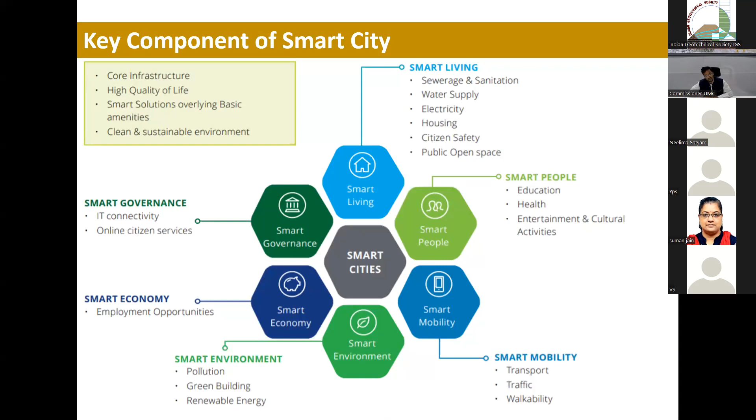Next, please. So as I mentioned earlier, the main focus is on how to gel all these things together, how to improve the mobility, how to improve the environment, how to do smart governance, smart living, which will involve your sewerage, water supply, electricity, housing, citizen safety, and quality of life. And there is an effort to converge different government schemes, like Pradhan Mantri Awas, and replacing old electrical infrastructure with new LED lights, new roads, and new sewage infrastructure. So there are many things which maybe smart city is not driving, but it is acting as a converging authority. Next, please.

Yeah, so basically the first part is institutional infrastructure to drive down the activities. The second part is physical infrastructure, which we all can see, roads, sanitation, and supply. And the third part is very important because without this third part, the second part is meaningless. So it's about how to improve the soft aspects, or the capacity of the populace of a city. Next.

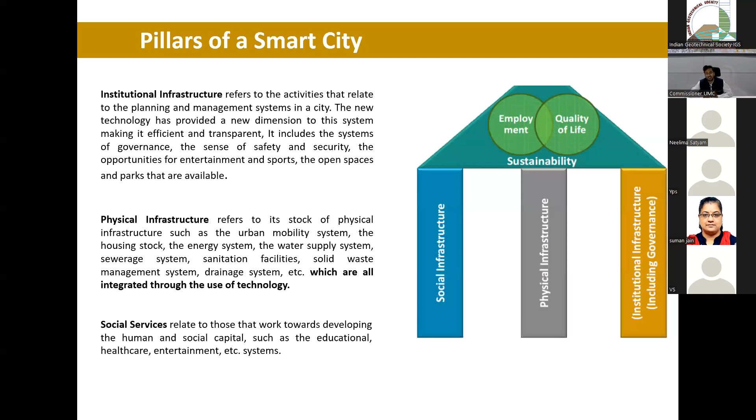So one very important thing which was introduced in Smart City Mission was area-based development. So in every city, typically the old city part was chosen for redensification or redevelopment, and retrofitting of the infrastructure was planned, because in many cities the infrastructure we have right now was planned or executed pre-independence or in early years of independence, either by the Britishers or by the princely states. So that infrastructure, especially the sewage and road network, is insufficient to meet the needs of the current population level. And then there is something called pan city initiatives.

So mostly what we call smart governance, and how we can harness ICT in governance, be it intelligent traffic management systems, or smart metering in electricity and water consumption, and multimodal transport systems, and a CCTV network in the entire city with crime monitoring via that. So those pan city initiatives heavily rely on technology and try to make service delivery more intelligent, less costly, or more effective.

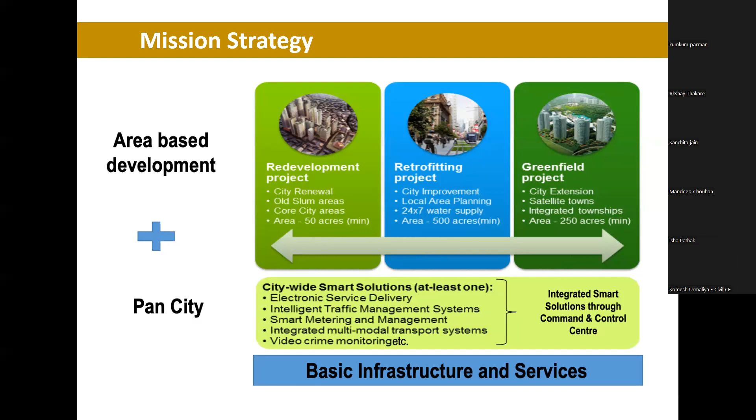Next, please. So city selection was based on the population and how the cities presented themselves.

More or less, many big cities, most of tier 1 and tier 2 cities across India have been selected. In my state, Madhya Pradesh, there are 7 cities - Indore, Bhopal, Gwalior, Jabalpur, Ujjain, Satna, and Sagar - that have been selected for the smart city mission.

The idea is that since this is the right time to develop tier 2 and tier 3 cities, the pressure on the metros and megapolises is reduced. There were different rounds where cities submitted their proposals, and on the basis of this, they were selected.

This SPV, which is a new kind of concept at the city level, is executing it. These SPVs have full-time CEOs and nominees of central, state, and ULB, and it's a very autonomous body which has been given power to plan and execute the projects.

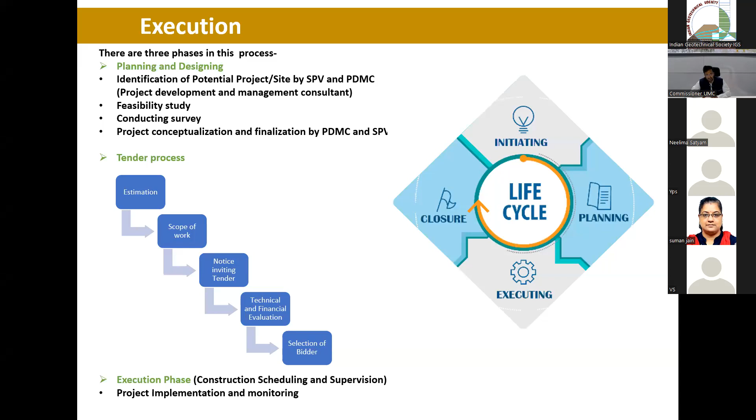A very important part is asset maintenance. While operating the project, asset maintenance is one part which needs attention. For that, most of the projects have been formulated where O&M of 3 to 5 to 10 years, depending on the asset, is built into the program.

There is a huge focus and emphasis on PPP mode, so that the risk capital allocation from the SPV side is reduced, and more projects can be undertaken with less capital.

Ujjain is one of the ancient cities in the world, almost as ancient as Kashi, as we now call Varanasi, and it has many firsts to its credit. Vikram Samvat, the Hindu calendar which we all follow, owes its origin to Ujjain. Ujjain is the city of the famous poet Kalidas, and the Indian meridian line.

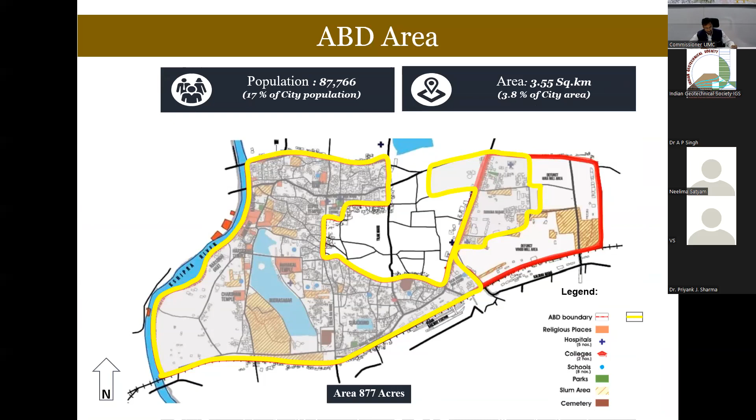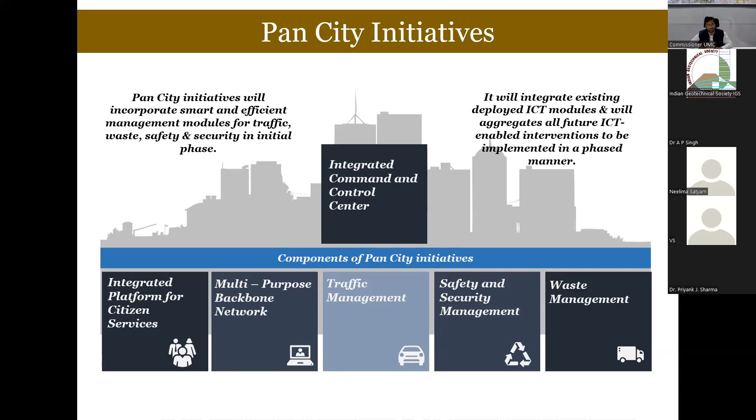The PAN city initiatives we have taken are based on ICT. For citizen services, we have a 311 app where all kinds of citizen services can be accessed and applied for by citizens. We also have an integrated command and control center which hosts all the applications and makes data flow from one application to another. For traffic management, we have put up RLVD cameras at all traffic junctions, controlled from the centralized command and control center. For waste management, we have a door-to-door collection mechanism which we monitor, and we are also processing all our wet and dry waste.

This is our very prestigious showcase project. We are trying to develop the area around the Mahakal temple, just like Kashi, by acquiring land around it. Most temples in ancient Indian towns face the issue of managing devotee load because of bottlenecks in the access and exit areas. We are trying to address those bottlenecks and create a space where the capacity to handle devotees increases manifold. In addition, we are creating facilities for devotees such as resting places, kiosks, visitor facility centers, better roads, evacuation by e-carts, and various bridges and roads.

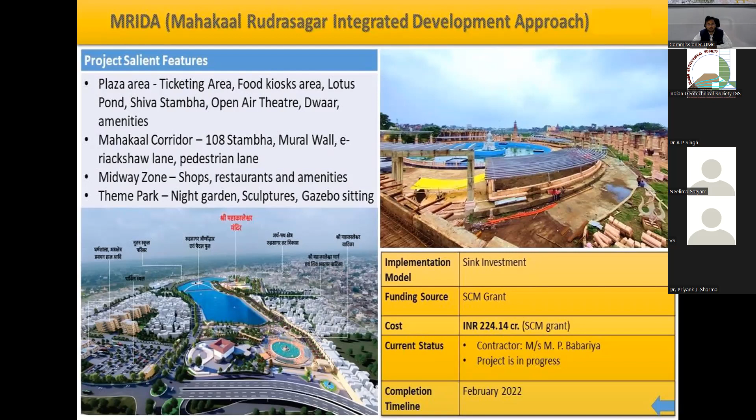This gives a bird's eye view of the whole project. I would like to invite all of you to visit Ujjain. This is under execution and we hope to finish it by February '22. After that, I think this would be the best, or one of the best, religious pilgrimage sites in India in terms of infrastructure available.

We already have a museum, the Triveni Museum, and we are creating open air theaters. We will have a zone where devotees can come and, like what we have in the West, experience the place. So apart from doing darshan and rituals in the temple, they can also get exposure to the rich heritage and culture of the city of Ujjain and the associated concepts of Indian religion and mythology.

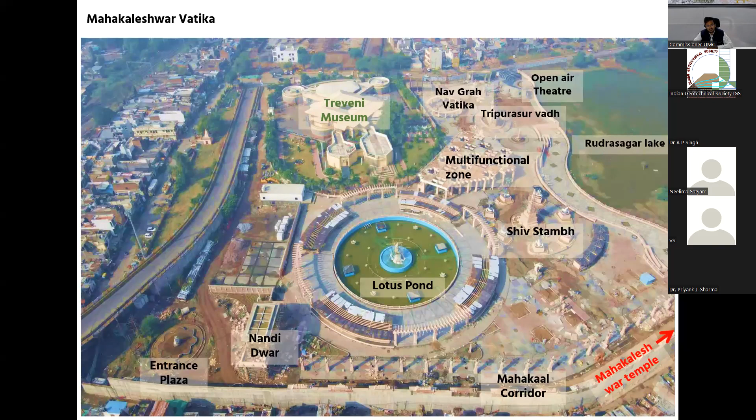This is one of the projects we are doing. Now coming to the technical part, since I'm not a civil engineer, I may be lost trying to explain it in the exact form you desire. But as I mentioned earlier, there's a huge part of civil engineering involved in day-to-day administration.

For example, this pond which we are making: there used to be an ancient water body here, mentioned in scriptures also. With time, the land was encroached and that ancient water body disappeared. So it was planned that we would try to revive it. When we tried to dig, we actually found that there is a water source, so there is a task to locate from where the water is coming.

I think here geotechnology plays a very important role, and we have to determine how to regulate its function. During rainy season, when the arrival of water might be more, we also have to ensure that the existing drainage network and this natural water source should not intermingle with each other. And how do we recycle this water continuously so it remains fresh with no bad odor. The construction around it should not hamper the water movement or the natural beauty in any way. These are the broad parameters around which our architects, planners, and civil engineers have to work.

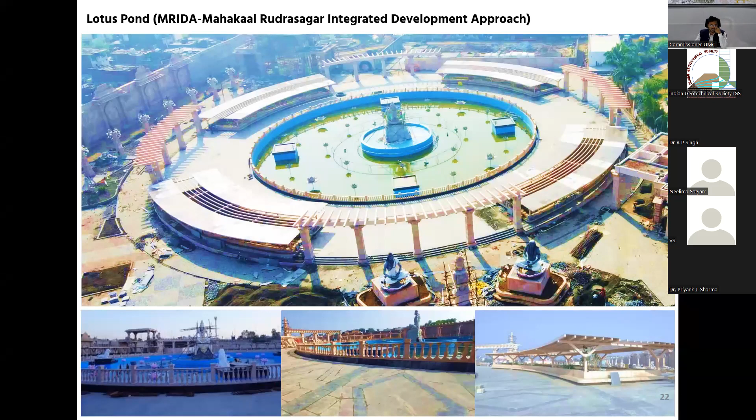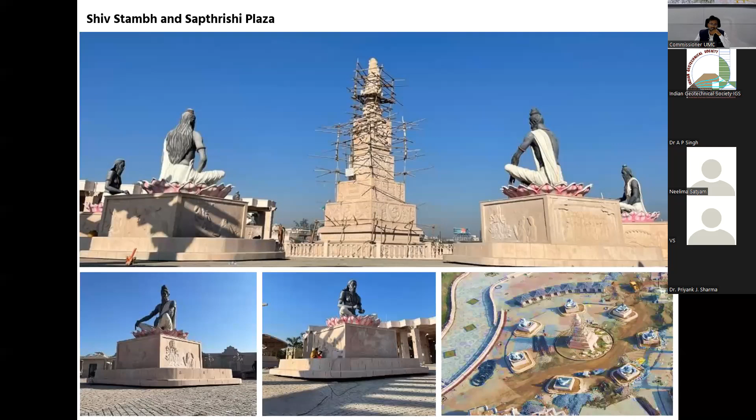This is once again new technology. We are using FRP, fiber reinforced plastic, to make the statues. What we see in this picture are the Saptarishi which we are making. Traditional stone sculpture takes time, and while it's not fragile, it's very susceptible to wear and tear. As a substitute, this new material we are using is a form of value engineering, because it gives the same look and feel as stone sculpture, but at a fraction of the cost and faster to make as well.

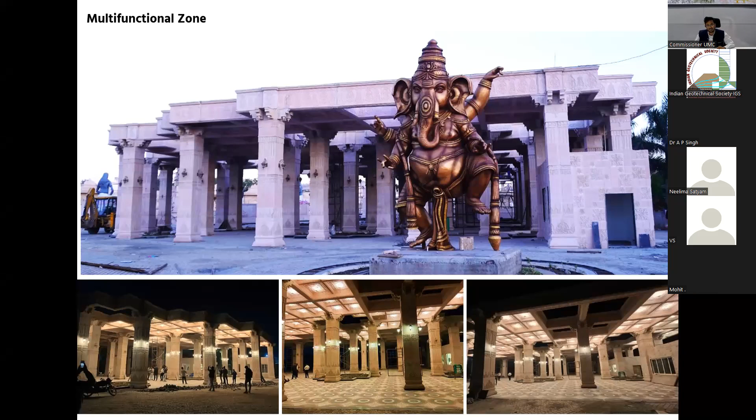These are some pictures of the plaza and the Lord Ganesha statue at the entrance. And these are the under-construction phases, just to give you an idea of the scale and expanse of the whole project.

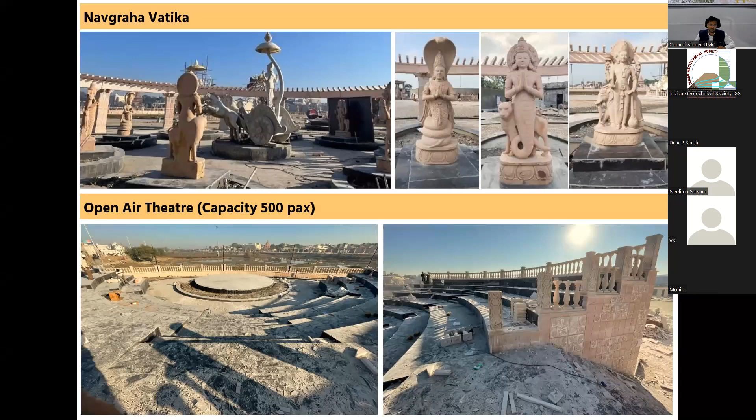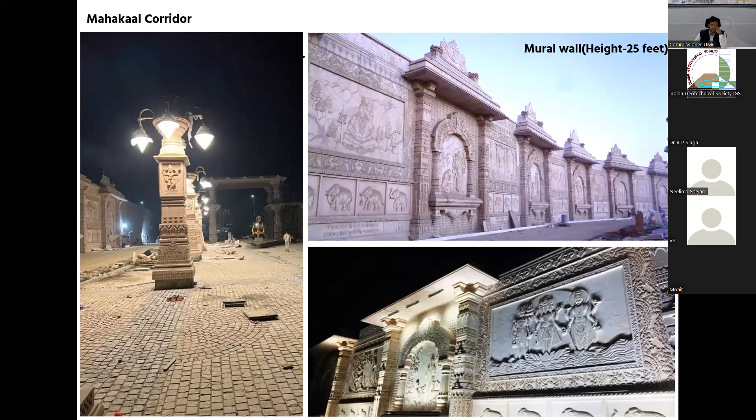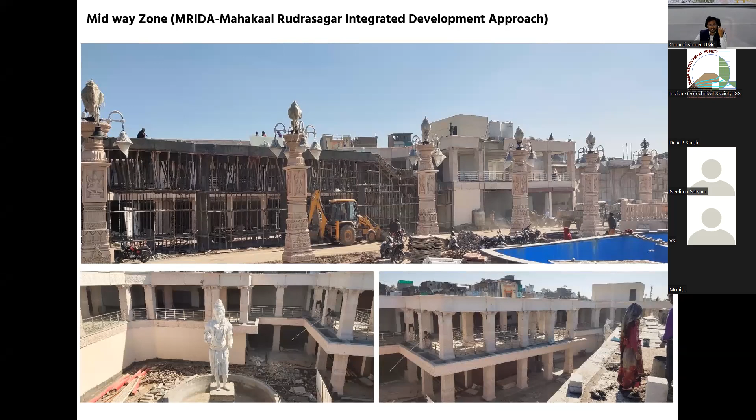This is one of the pictures of our visitor facility center, where we'll be creating a facility for devotees when they arrive at the temple complex. Here they can put their shoes and belongings and get registered, since there is a security aspect as well, and they can rest, with drinking water, toilets, and other facilities.

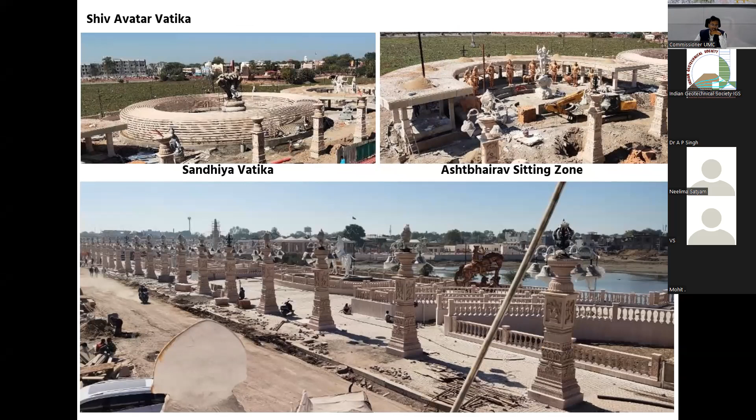This one is NeelKanth Van, one of the land parcels on one of the main roads which we had acquired. It's near the riverbed, so this is also one of the aspects which will interest civil engineering.

This is not the Mannat Garden area, no? The Mannat Garden one, no. No, this is the other one.

Here basically what we have tried to do is integrate a parking space, a resting space, plus landscaping in a single thing. This is something interesting from the civil engineering and architecture point of view, because these are the needs in such public infrastructure -- you just can't create a bare parking space, because it is aesthetically ugly and it doesn't address the requirements of visiting people. So here we have parking as well as sitting space plus a garden area, because all construction and development should have, as per norms, 30% or 40% green space. We have tried to follow that instead of making concrete jungles.

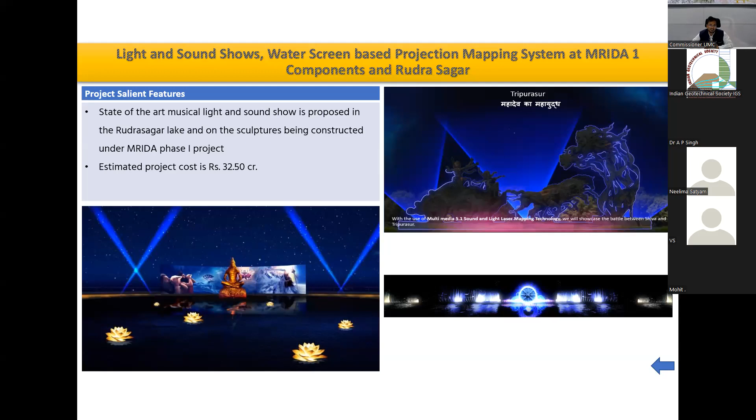This is one of the very interesting projects. We have a very old, around 200-year-old Maratha style architecture, what we call a Dharamshala. Because this was Maratha territory, and now that building has been converted into a school.

So now we have shifted school, and this old building we are trying to preserve, but functionally make better use of it. So we are now trying to make it a heritage Dharamshala, or we can call it a hotel cum museum. IIT Indore is associated with it because we took help of experts from IIT Indore for the structural audit of the building.

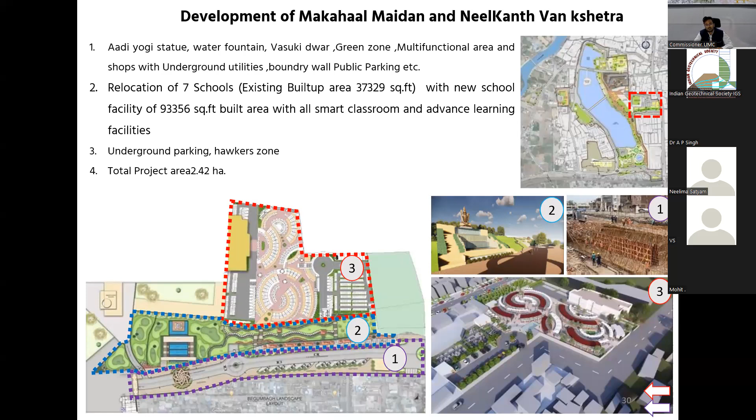This is also one of the interesting projects. There used to be this old pathway from the river ghat in Kshipra leading to Mahakal. I don't have an old picture, but this was covered in bushes, soil and mud. During digging, we discovered it, and then we tried to revive it. We plan and hope to finish this very soon, and this picture shows how the work is going on.

Once again, we are trying to use the old material with which it was made. We are not doing any cement or concreting kind of thing, and using the old filling material of lime and mortar.

I think this is a very interesting thing which technical experts working in this field should think about, that these kinds of buildings are strewn all over India. As we progress and become more aware about our ancient culture, we try to revive this infrastructure with more environment-friendly materials, actually with the materials which were used in olden times, to maintain their glory or past form, so that the current generation can connect with them.

This is very important from an engineering point of view, I think. Whether you call it civil engineering or geotechnology, the kind of structures which were made in ancient times, without the help of heavy cranes or heavy machinery, are buildings which survived for so many hundreds of years.

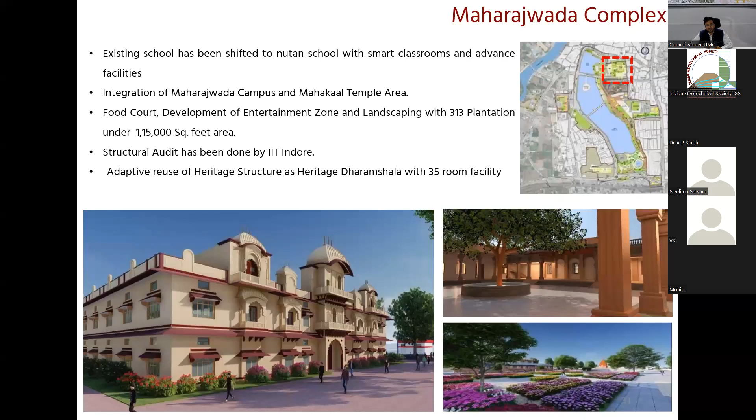So this is like one of the water bodies, Rudrasagar. All the pilgrimage sites and old temples used to have, and were bound to have, a huge water body near them, which had multiple functions: used for drinking water, to get water for the deity, and for bathing by the devotees. After we started having municipal water supplies after the 1950s or 60s, gradually all these water bodies lost their importance in the mind of the public.

Citizens started using them as dumping grounds or encroaching upon them. Now with the concerns about climate change and sustainable development, once again city planners are focusing on these kinds of water bodies. I think this is also one of the areas where technical experts, this society and other societies, should focus on - how do we revive these old water bodies.

All these water bodies across the cities and towns in India are facing 2-3 issues. One issue is huge population pressure - we have quadrupled our population in the last 75 years, so there are quite a good number of people living on the same land. Because the population has quadrupled, there is a requirement of drinking water, and generation of sewage, which should not go directly or untreated into these kinds of water bodies.

It's a very sad situation that most of these water bodies have very high BOD levels, and even the marine life inside them has dried up. A few water bodies can be undertaken by cities under smart city missions, as you know, because they are marquee projects. But I think it would be very wonderful if various water bodies are revived.

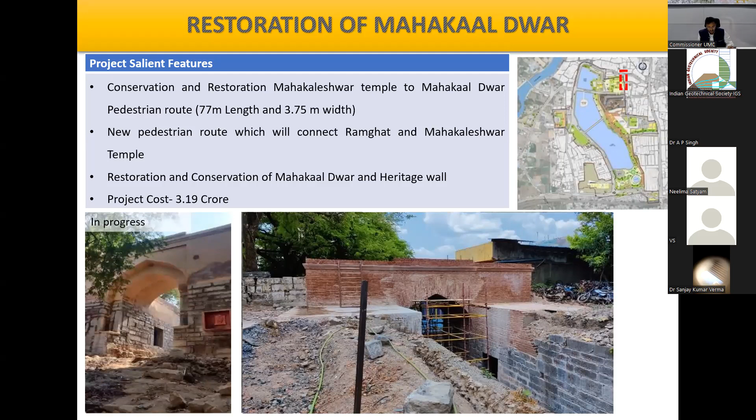This is once again a kind of modern development. Normally what we see in our cities is that the road is made, and after making the road, after 6 months, the water supply department comes and digs the road to lay the water pipeline. Then after another 6 months, the mobile company comes and digs the same road for laying the optical fiber. And if this is not enough, after 6 months, the gas company comes and digs the road for laying the gas pipeline.

To address all those kinds of issues, for the new development, we are trying to create smart roads. We are giving the ducting and leaving space for all kinds of future linear developments, so that the road is not dug again and again. Plus, these roads have ample walking space and cycling space, so that going forward, citizens can move to this environment friendly aspect of transport.

One very important part I would like to point out is that this kind of roads are very costly, and as opposed to national highways where you can have toll and try to recover the cost of the road with time from the users, intra-city tolling is not right now prevalent in India, and it's not right now possible either. So we need to think about modes of development, because simply on government funding, maybe we can't make all the roads in this kind of smart roads with ductings around.

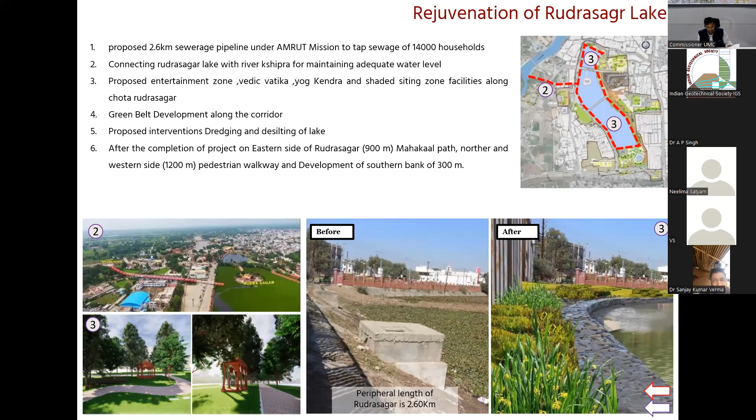Next please. Yeah, so this is our riverine ghat, and one very important thing which I learned or discovered while being involved in these projects is that river ghat is a very unique Indian concept. First of all, rivers are gods, I think, not in many civilizations. Indian civilization is very unique that we worship rivers, and river ghat is a very unique concept.

So you go to China, or you go to Egypt, or you go to Babylon like Iraq, or you go to European nations, rivers do have important places in their civilizations, but none of those countries typically have a concept of river ghat, where steps around the river is such a nice concept that it's a public place. Public can come here and indulge in all kinds of activities, be it religious, be it secular, and in that way it's a very egalitarian concept also. So I think that is the reason that all our cities, especially riverine cities and religious places, have ghats.

So developing these ghats is kind of what you see in European cities as public plazas, or the places where people come and congregate and various kinds of activities happen. I think the river ghats had similar role in our ancient life, and that is what we are trying to derive here also. Plus, there is a very utilitarian angle of enhancing the capacity to handle the number of devotees, or crowd, or people also.

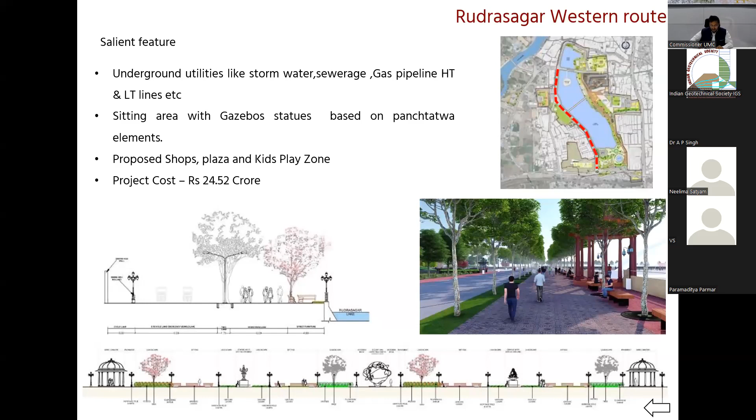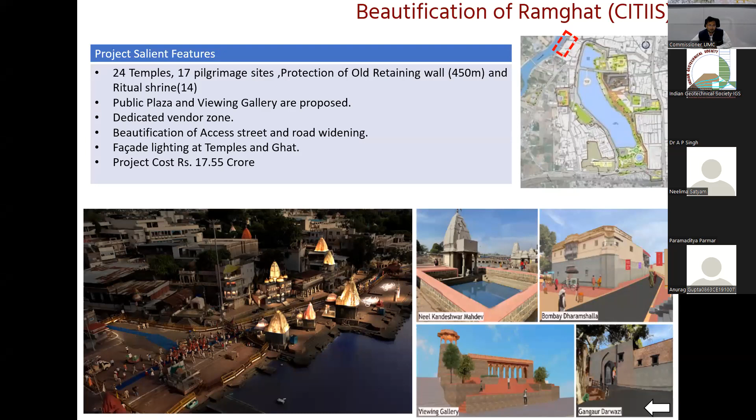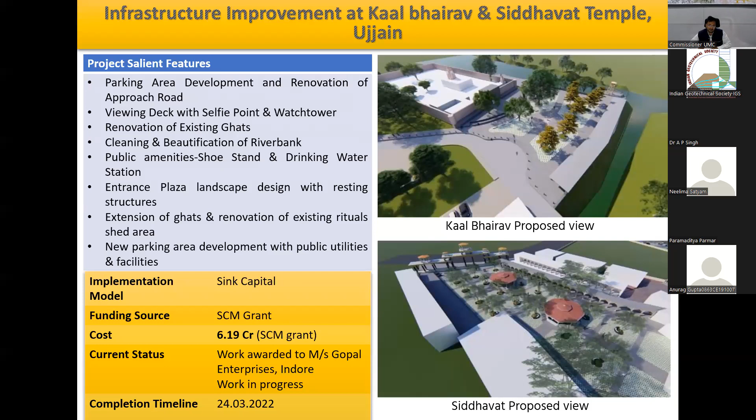Some of you might have heard about it. This is a kind of compulsory part of development nowadays, so we are planning to have a light and sound show here as well, depending on new technologies, be it laser or water screen and all those things.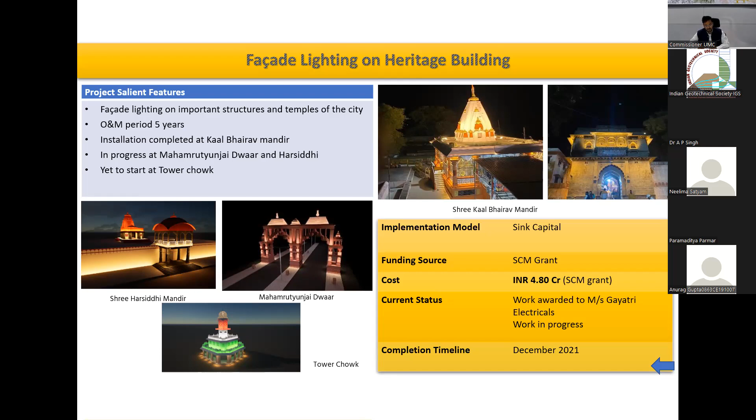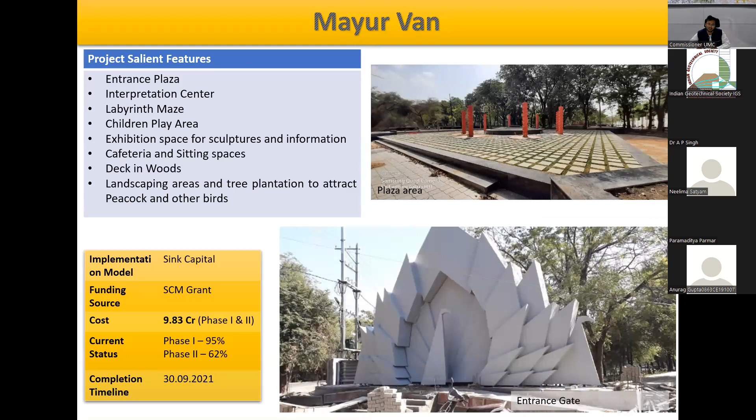This is just a picture of how the temple looks now. Of course, we are using the dynamic effect - we have synced the sound with the light, so when the sound changes, the light also changes colors accordingly.

We are also developing some gardens across the city in the pan-area city development, because having public spaces, secular public spaces where people can go and relax is very important for the mental well-being of the population.

This is one of the projects I was mentioning earlier. This is a very nice Baoli, and all of us have seen photos of Rani Ki Vav in Gujarat or Agrasen Ki Baoli in Delhi. If you see the first one, we call it popularly Modi Ka Chopra, and I think in its scale and expanse it is no less than those two places. Our failure or shortcoming has been that we haven't been able to project it on a national consciousness or promote and advertise it as much as other places have done.

These are a few pictures of different old water structures which had gone into disuse. With the help of remote sensing and geotechnological advancements, it will be very interesting to see how these water networks used to operate, how they are connected, and how they can be revived. Right now we are trying to do desilting and trying to dewater and clean them, but I think more technological interventions can be done which will make this intervention sustainable.

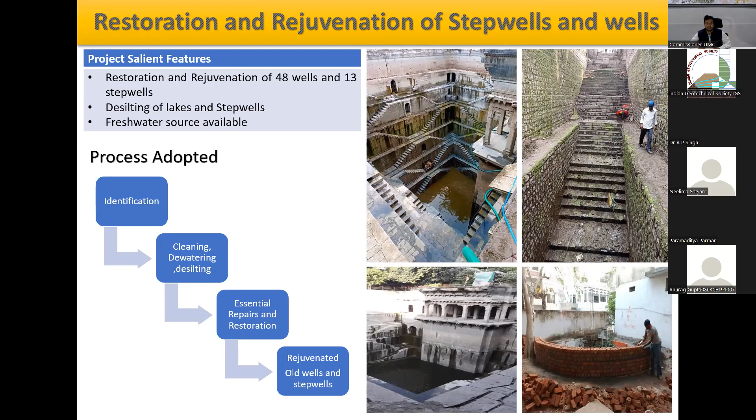One thing we are trying to do is a SCADA system. Traditionally, water supply works by taking water from the river or some source, pumping it to different water tanks inside the city, and then pumping it to households. But monitoring the water supplied, quantity and quality in a smart way is happening in metro cities, but not in many others. It's very important to know how much water you are pumping in the city - this will help reduce non-revenue water and also help us move toward metering, because right now it's flat metering in most cities. Once water is metered, measured, monitored, and charged for, citizens are encouraged to use it judiciously as well.

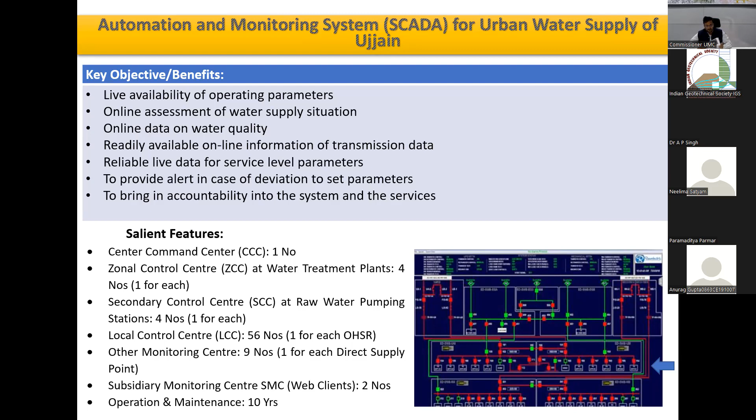These are some of the school complexes we have made - these are government schools, mind you, not private schools. The whole idea is that human development is also important in this. In this lower picture, you can see on the roof of the school we have solar plants - the effort is to make this building a zero discharge building. We have put in vermicompost, wastewater STP, as well as the solar plant, with the idea of making a smart school in the true sense, coupled with smart classes. The last two years of COVID experience, when classes moved to online mode, validated that e-learning would be the way going forward. This kind of facility should not be reserved only for students in the private sector - students in the government sector should also benefit from this new concept. That's the idea behind this project.

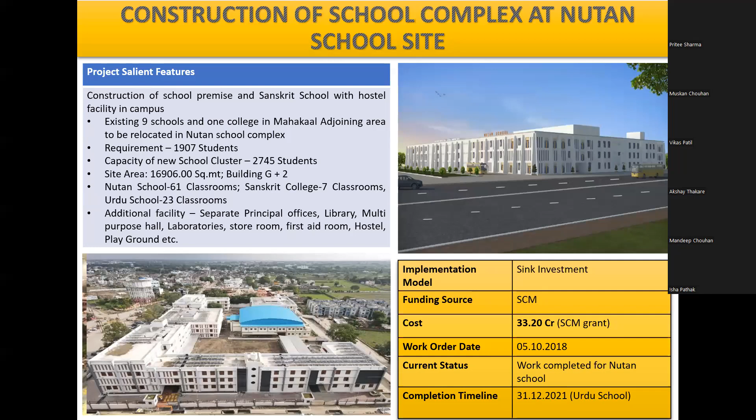This is one of the other schools, and I think in terms of hard infrastructure, this is no less than the best of the private schools around.

This is the smart classrooms.

There is some disturbance, I think. Somebody can mute their mic.

These are the smart classes which we have implemented, and this has proved very useful in universalizing access to education during the COVID times.

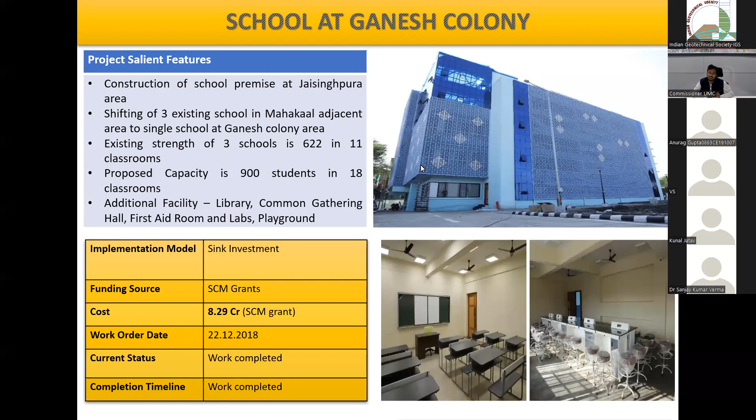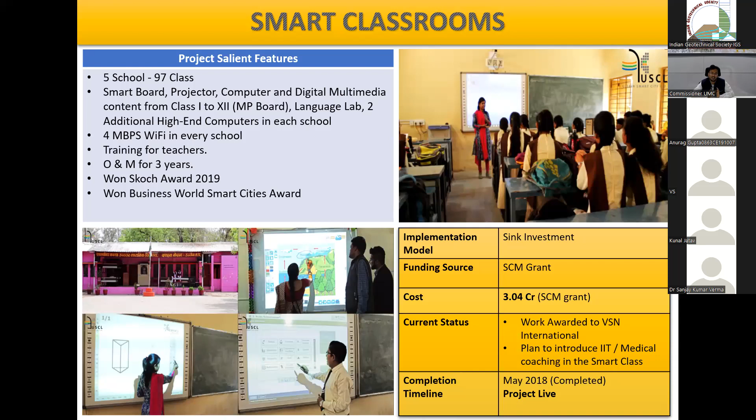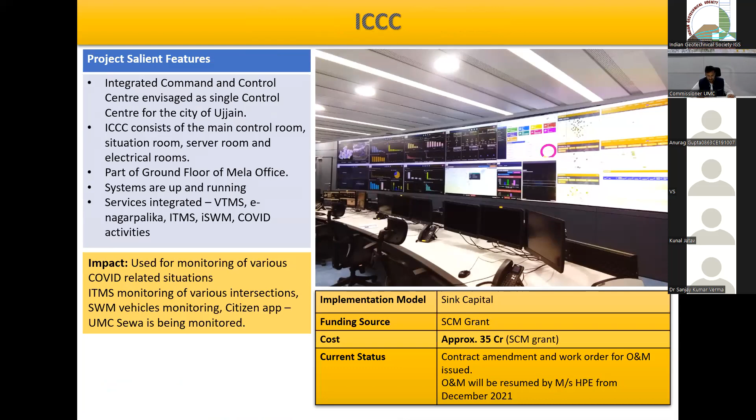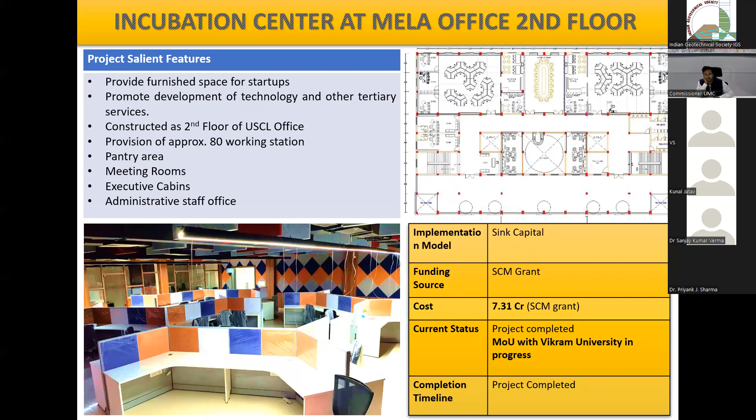This is an incubation center. So all the smart cities are also attempting this, because in small cities we don't have many IITs and IIMs across. So in places where there are no IITs and IIMs, smart cities are trying on their own to give a space where small ventures and startups can incubate themselves. This is a very important project.

And of course, also access to all the information and material available on the internet. I think this is something which is very replicable and at a very low cost, and going forward it will help in reducing the gap between those who have access to the technological wonders and those who do not.

The idea is that once you make this road, it is not to be dug up for many years. Different issues we see, that roads are waterlogged during the rainy season, or the infrastructure mapping is not there - those things we are trying to address by making this smart road. I think these are actually smart roads in a true sense of the term.

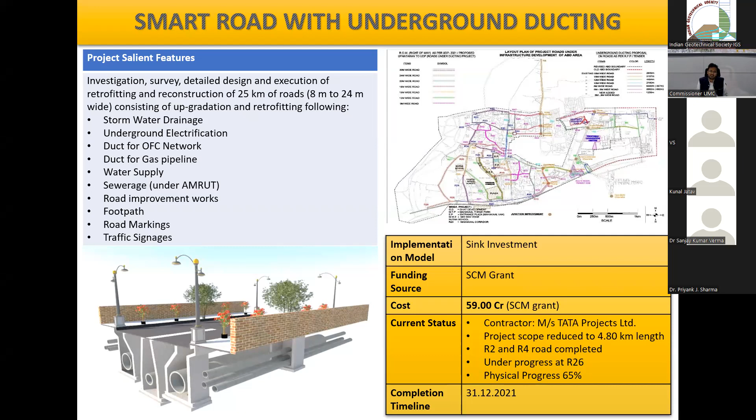I would invite the esteemed members of the Geotechnical Society to visit these projects and give us inputs, suggestions, and feedback on these kinds of projects. This just shows the cross section.

Where is the storm water drain, where's the gas pipeline, where's the water supply, where's the sewerage ducts, and electric chamber. There is logic behind why we are placing something on the inside and something on the outside.

And then how do you access them when you have to do repair maintenance work, or when you have to replace them or dig a new line. I think this is important because there is an issue of logistics.

In new developments, in new colonies, and in the outer area of the city, this can be done very easily. But in old areas where development is already there and there is huge population and usage pressure, replacing the old infra with this new infra is tedious, and it has to be planned in a very meticulous way, because there is huge disturbance to regular public life for the few months when you are laying this infrastructure. This brings us to the question of what is our speed of execution.

I think this is where we need to learn from China, that once you start a project, how much time you take to execute it.

Apart from inconvenience to the public, there's a cost, direct and indirect, when the project takes time to execute. I think it's significant, and we need to have a discussion and understanding of that in our public and development discourse.

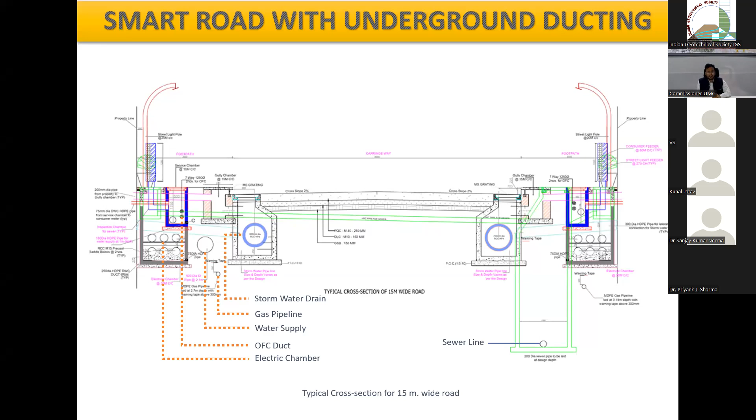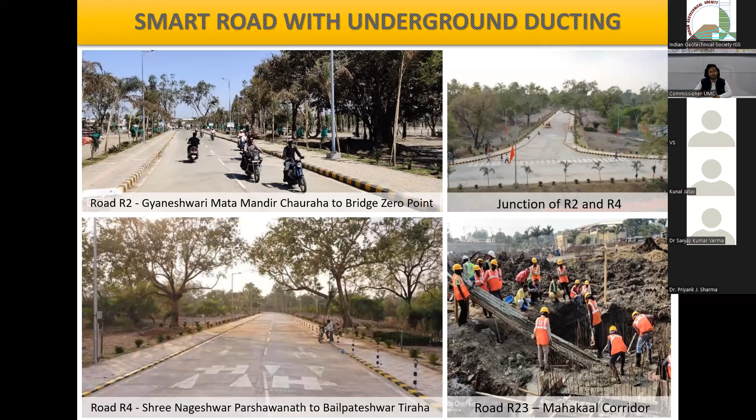Mind you, our city is a tier 3 city, not even tier 2. I still believe this is the right time to create this infrastructure so that these cities can springboard on the development journey and become places where new ideas, new industries and new business can come, if we provide them the right infrastructure.

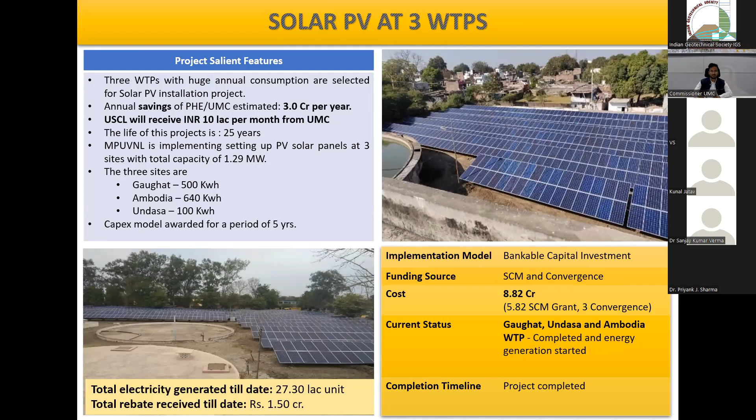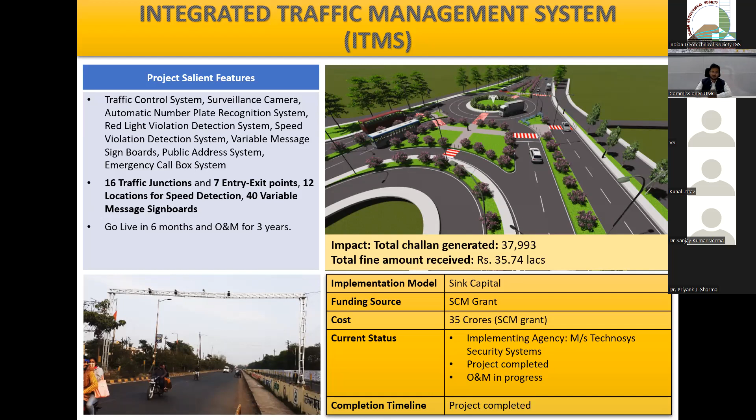These cameras and junction interventions are useful because they also have video screens which we use for different kinds of public messaging, and audio systems which we use for public announcements. This is one intervention which is very useful and helps in improving citywide governance.

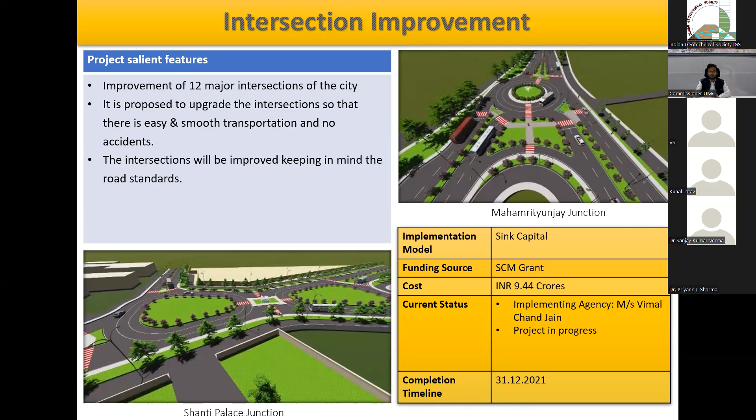There can be two models. One is a huge CNG plant that takes all city waste, to the tune of 100 or 200 tons, to that plant with large capacity reactors to generate CNG. The other model is to have small biomethanation plants spread all across the city, wherever there's a sabji mandi or vegetable market, retail or wholesale, and use its residue right there.

This is one area where I would urge all technical institutions to do more research, because right now the technology we are using is German technology. More research and initiative is needed from our technological institutes to see how we can process our waste in a scientific way, make it more usable, and what happens after that. I will use this forum to invite any researchers interested in demonstrating some technology or doing work in this field.

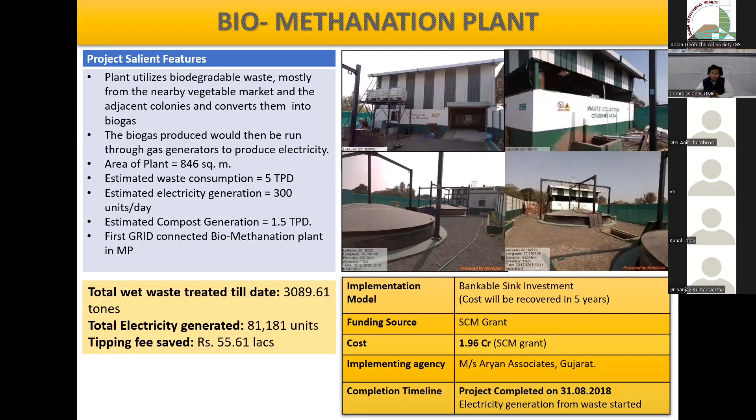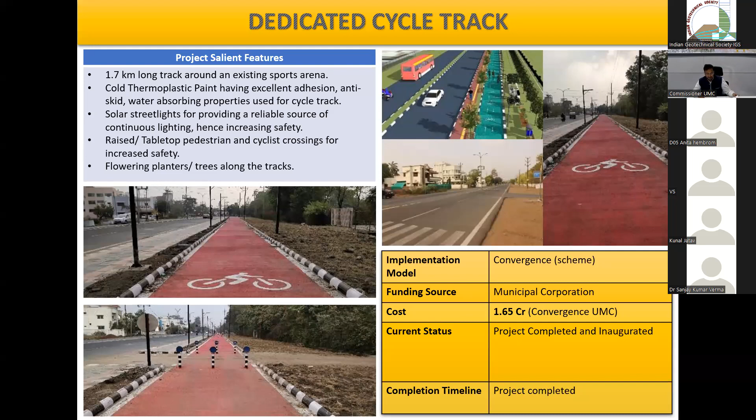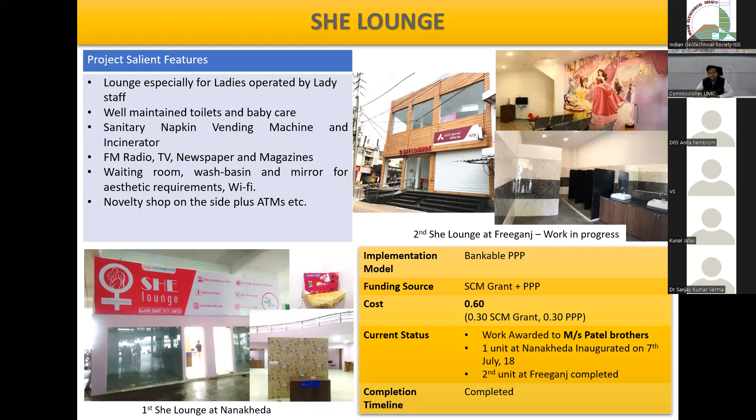This is a very nice intervention, useful in terms of women empowerment - having a lounge for ladies, especially operated by lady staff, plus facilities for toilets and baby care. We've created these facilities at the bus station, railway terminus and main markets, so that a safe space for women is created, with all the amenities.

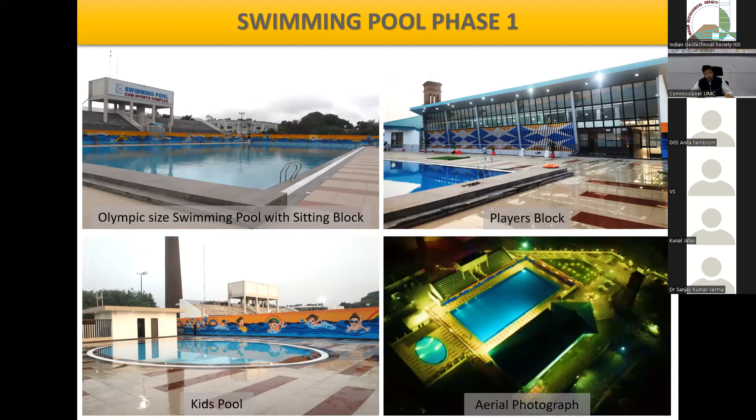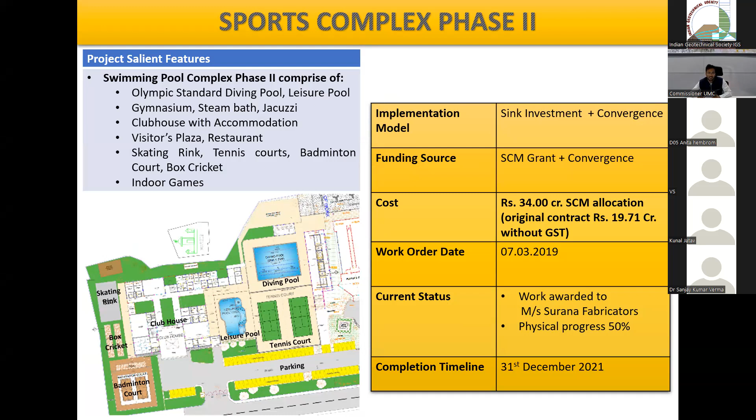These are a few of the other infrastructure projects we created, in terms of swimming pools and sports facilities, including a sports complex. As I mentioned, despite being tier 3, we aim to create this infrastructure for the populace, so that this is the right time to build it - in our journey from tier 3 to tier 2 and then tier 1, we'll have all the infra we need. Here are just a few pictures.

I think here also the role of civil engineering or geotechnology is very important, because these structures are supposed to last for the next 50 years or so. Doing proper testing and ensuring they meet all requirements, especially stress testing and reliability testing, is a very important part of all these kinds of projects.

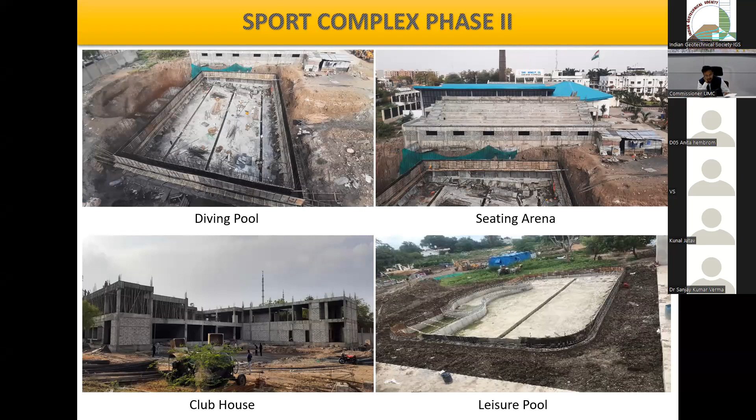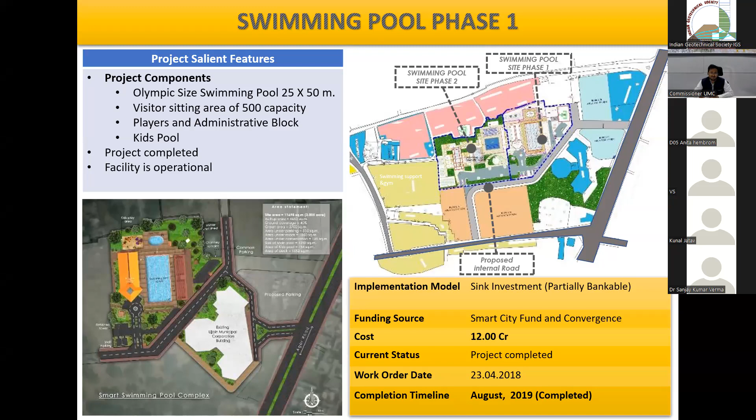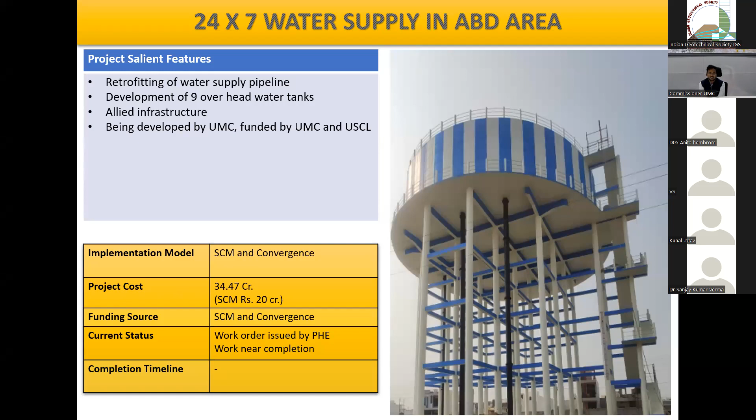This is where I think this part of creating a good impression, that we are doing so many great things, ends. No citizen of Ujjain is here in this presentation - otherwise they would have given you a critical, honest assessment of what we are doing and what we are failing at. But this is Sunday, so I think I can feel good about myself and my organization. So, it's open to questions now.

Was I audible? Yeah, you are audible. I'll just stop the screen share.

Thank you so much, it was a complete project, you put it up in an hour, and I can see a lot of changes in the last two years that happened in Ujjain. I could not visit, so just to inform you, a lot of things are happening at the lab scale at IITs, in other departments and the civil department also. Only problem is your lecture will help us link what we are doing, because here at the lab scale, that smart metering or monitoring thing you mentioned has been funded by the Government of India five years back. We have the complete system ready, and I was the PI of the project for both quality and quantity monitoring when I was in Hyderabad. But after that, it is at the lab level, we don't know where to take it up from there.

So this talk should help all of us. Along with me, our colleagues from other departments are also here. Dr. Vipul from Electrical Engineering is here, he is heading the department. And my colleagues from Civil are here too, who work on waste management - Ashutosh is there, and Priyank Sharma, who works on the water and drainage part. We'll be very happy to interact with you even in future.